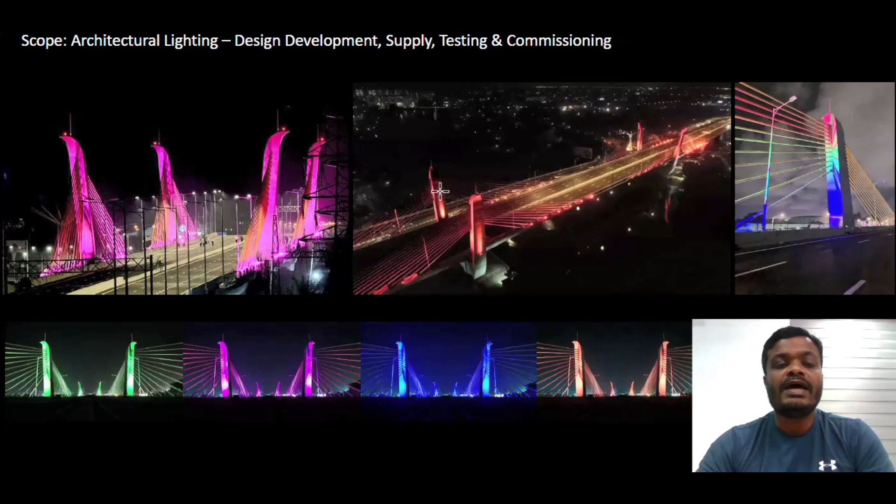Before we started the design, we had a couple of meetings with the client to understand their requirement and what the possibilities and challenges were in delivering this project as per the client requirement. So this is the bridge basically. At the beginning, the client wanted to illuminate the entire structure, meaning the top part and bottom part, including the cable ropes as well.

At the beginning, the contractor, because this project is a design-build contract under Sumitomo Mitsui from Japan, proposed to the client a single color solution, meaning a 3000 Kelvin warm white solution.

When we had a discussion with the client, they said they needed a color change solution for this bridge, and then we considered, with the budget, whether to illuminate the top part and bottom part both together or not. With the budget considered, we finally ended up illuminating only the top part, not the bottom part. There are a couple of reasons for that.

This bridge can be seen when we enter the bridge; we can see the cable ropes and the pylons only when entering. And from the city side, we can see the top part of the bridge on both sides, basically not the bottom. The reason is the bottom is covered by the existing bridge on one side, and on the other side the bottom part is not visible from far away. There's no city view from that side. So therefore, we decided we would only illuminate the top part.

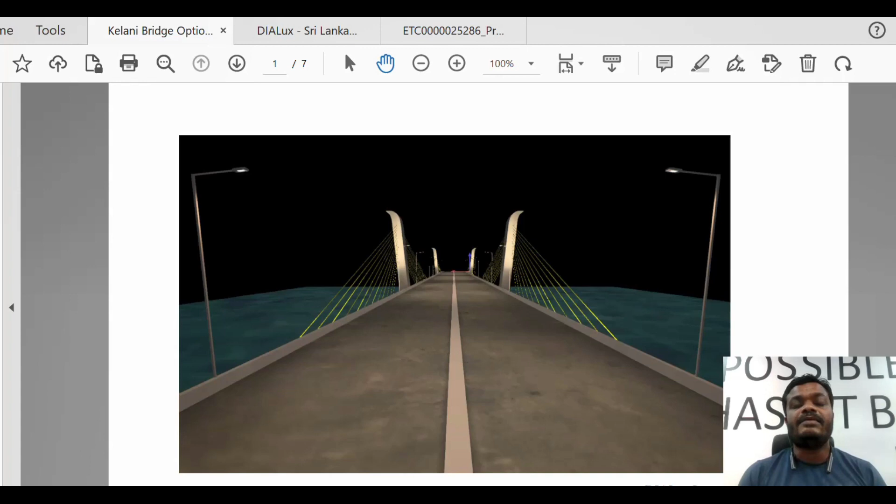Now we will move to the design part. When we started the design, we used Dialux software and some lighting softwares to generate lux level reports, rendering images and rendering videos. As I explained before, the first option was single color. It means white light, 3000 Kelvin. This was the report we generated for the single color proposal as option 1.

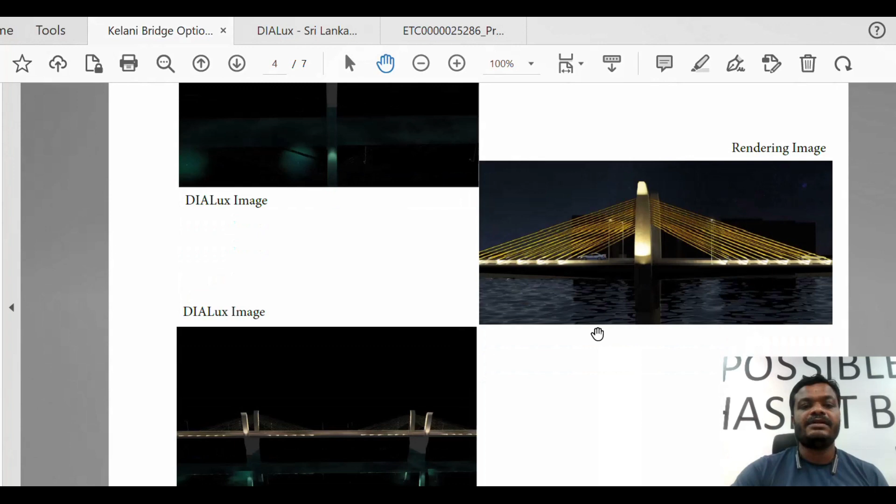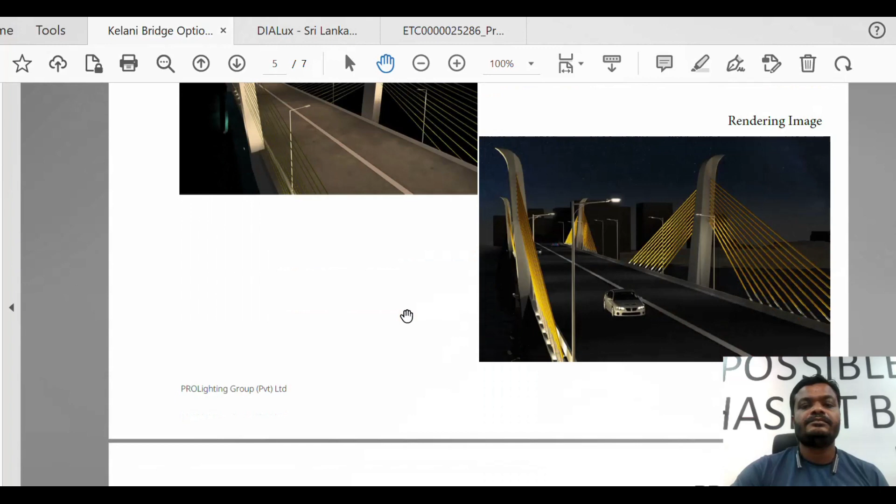These are the images we created using Dialux, different angles. This is the image on the water. This is the water surface reflection from the light. This is a Dialux report. Sometimes you might see, comparing with rendering images from lighting videos, this one is a bit different, but this one is technically more accurate, the Dialux software on the lux calculation.

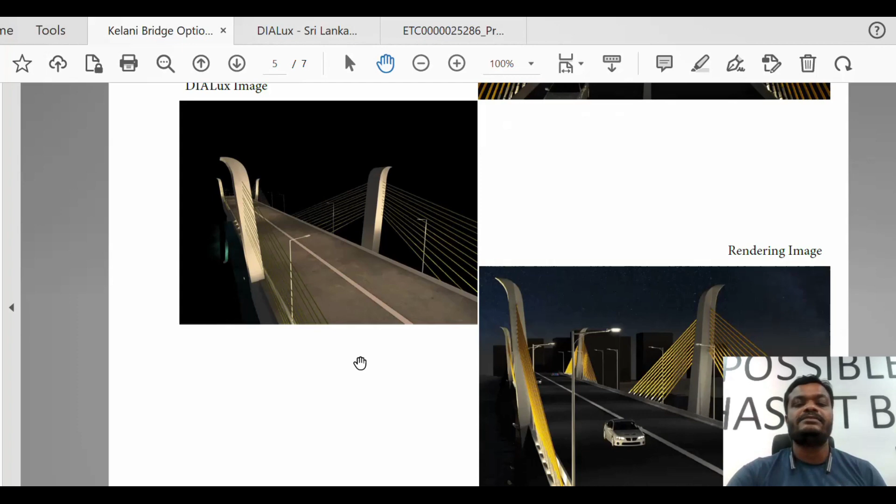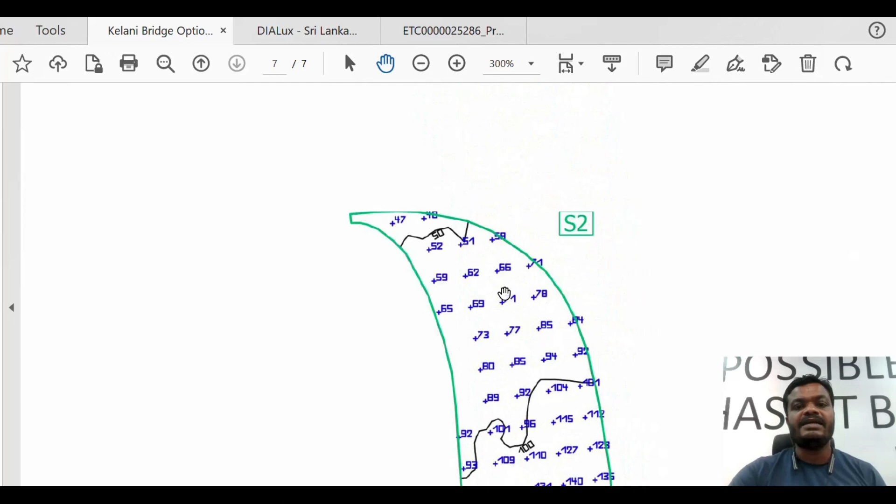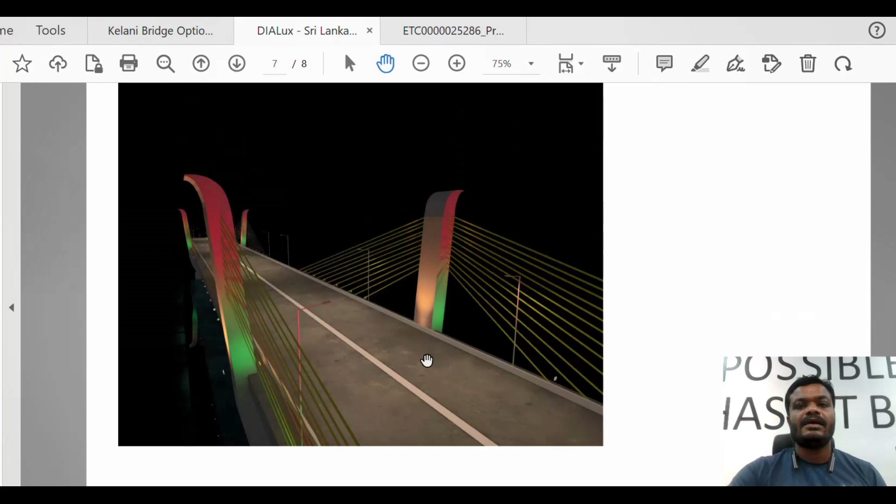So this is the Dialux map on the pylon. You can see the lux level on the pylon and the pylon side structure. This is the lux level, and later as option 2, we finally moved to the RGBW solution. These are the lux level images we created using Dialux software, and these are some images we used Dialux software to create.

This is the video we generated with Dialux and other rendering software to explain to the client. This is the kind of rendering video. Before I start this video, I have to explain the behavior of lux. When we calculate lux level, the behavior of single color and RGBW is completely different.

For example, a 100 watt single color light has a lumen output of around 10,000 at 100 efficacy. But when it comes to RGBW 100 watt, it is sometimes one third, sometimes 25% of the total lumen output. I will explain in a coming slide using data sheets of the light fittings why it is different. So let's see the video now.

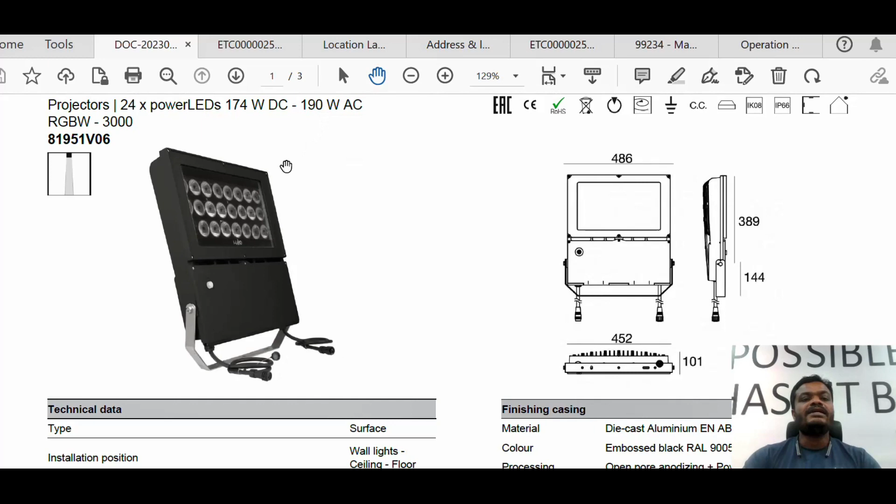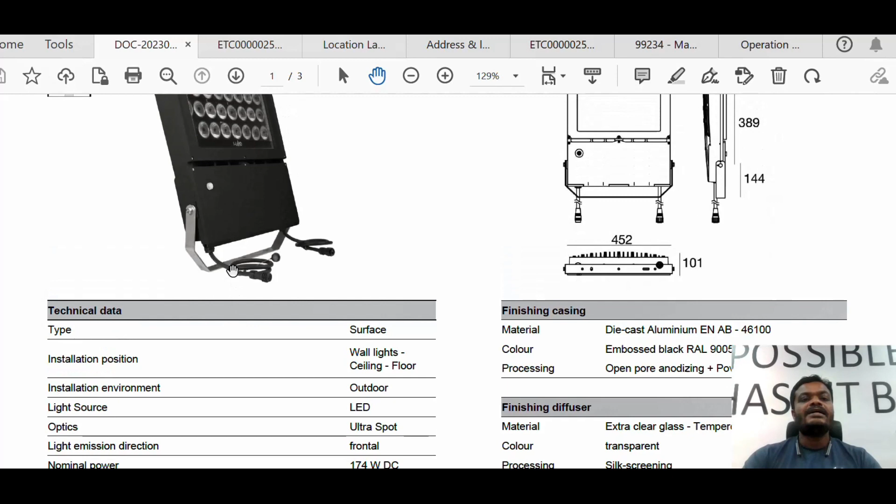So this is the light fitting we used to illuminate cables and sides of pylons. There are two wattages mentioned: 174 watt DC and 190 watt AC. So why are there two? The 174 watt DC is the effective power working with the LED modules, used for the Dialux lumen levels. 190 watt includes the driver part with the AC input, but for effectiveness we use 174 watt DC.

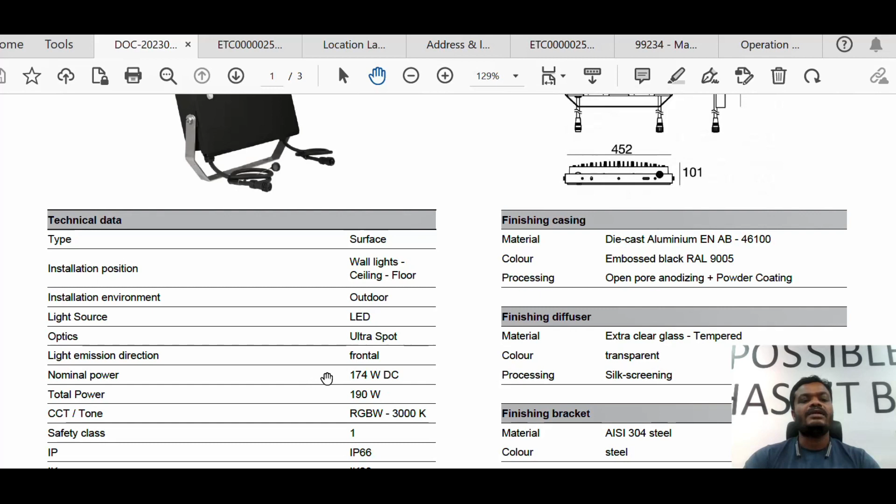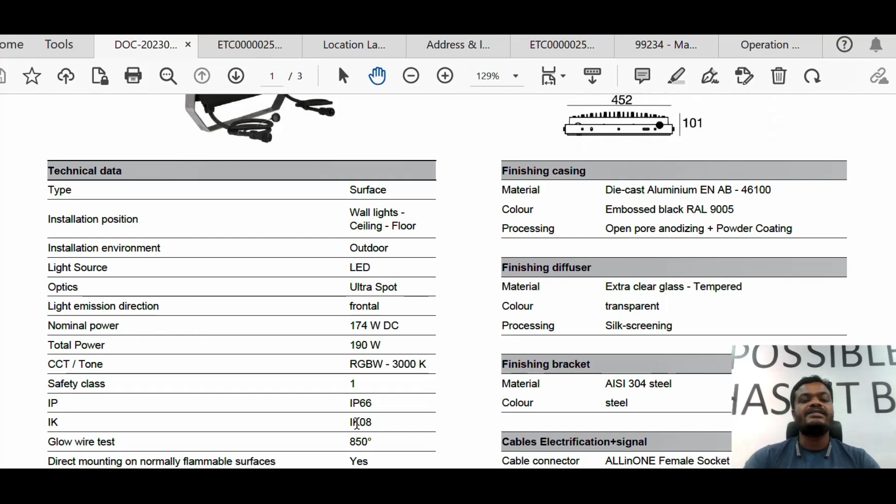A lot of the time, manufacturers give only one wattage, total power or nominal power, mainly nominal power, but for these fittings they have given two. IP rating is IP66, and IK rating, meaning the mechanical strength of the fitting, is IK8, and DMX control.

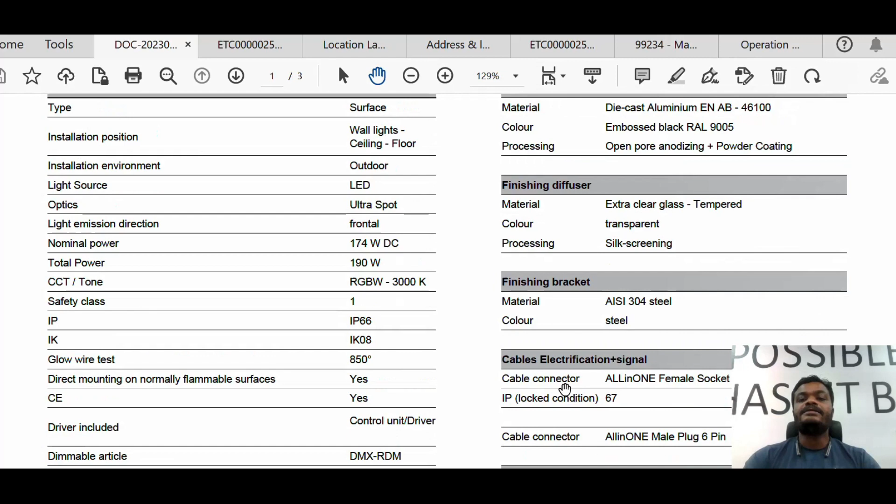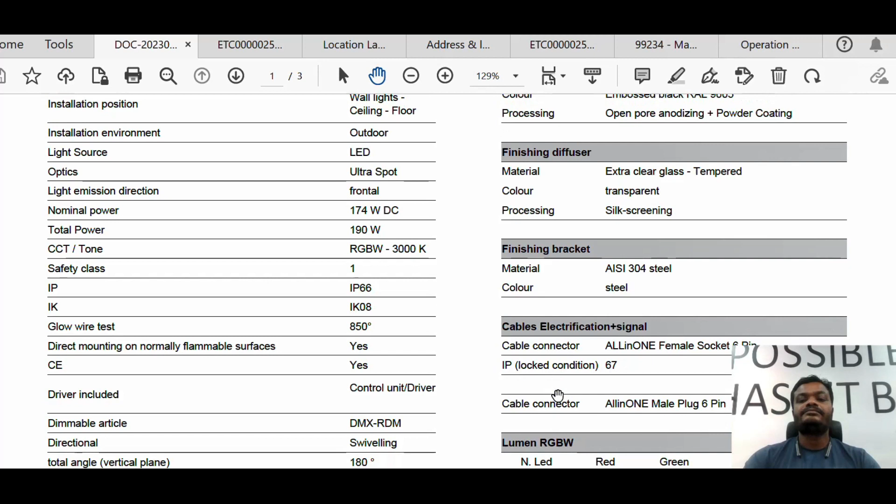These are the parameters: main parameters, casing parameters, finishes, diffuser parameters, and bracket details and signals. What are the ports available? See, this is what I have explained before. Later part I will explain. You can see four types of lumen output the manufacturer has provided.

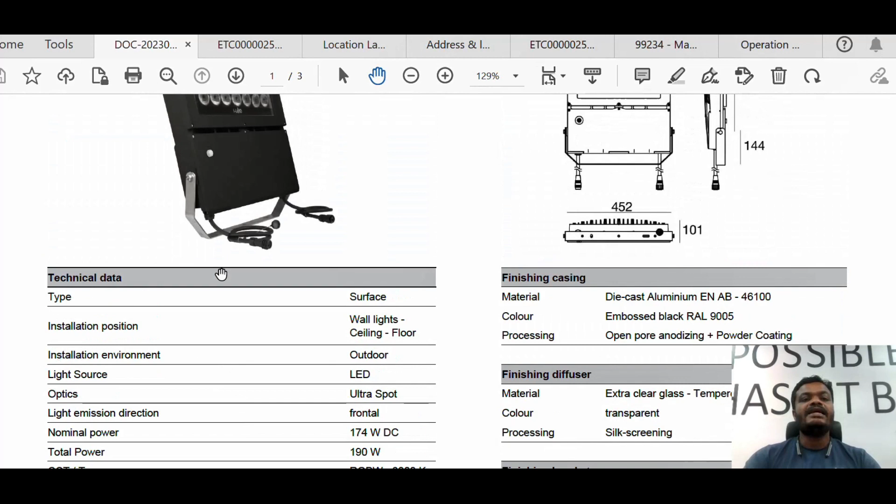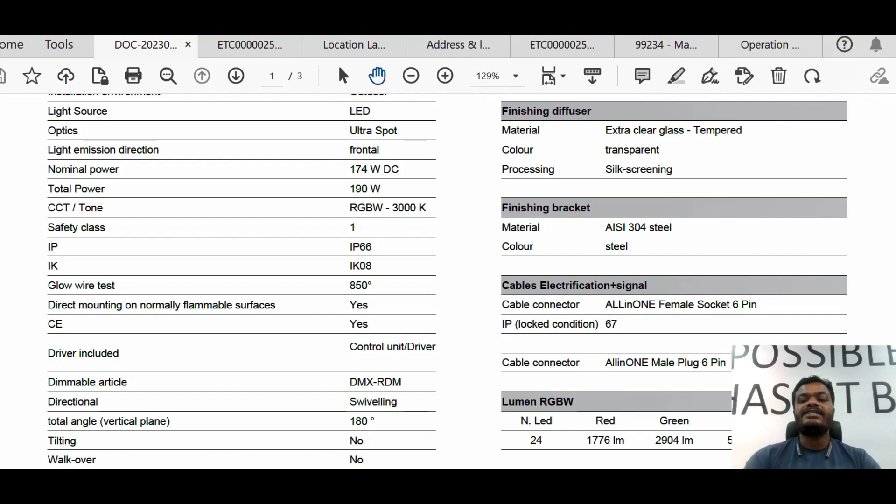It means in these LED modules, when RGBW comes, there are four types of LEDs in equal numbers. It means red LEDs only illuminate red, another group green, another group blue, another group white. With changes in the percentage and the dimming only, the fitting is releasing different colors we can see from the outside.

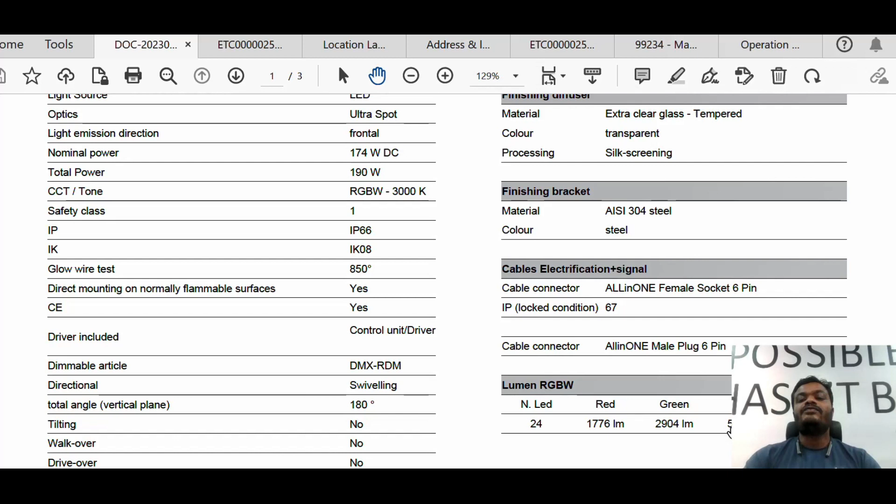So this means when the red LED modules are on and the others are off, this lumen output is 1776. When only the green LED keeps illuminated at 100% illumination level, it is 2904 lumen. When it is only blue, 504. If it is only white LED modules at 3000 Kelvin, it is 2028. So you can see, as I said, 174 watt at 100 efficacy.

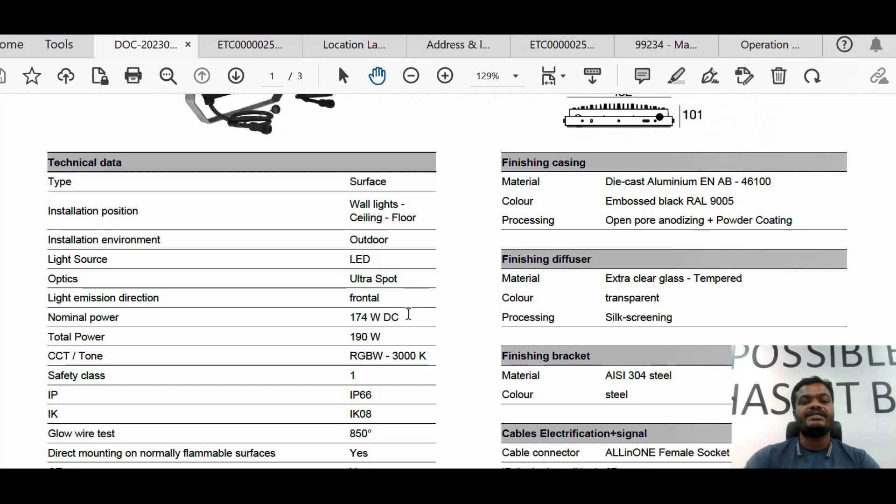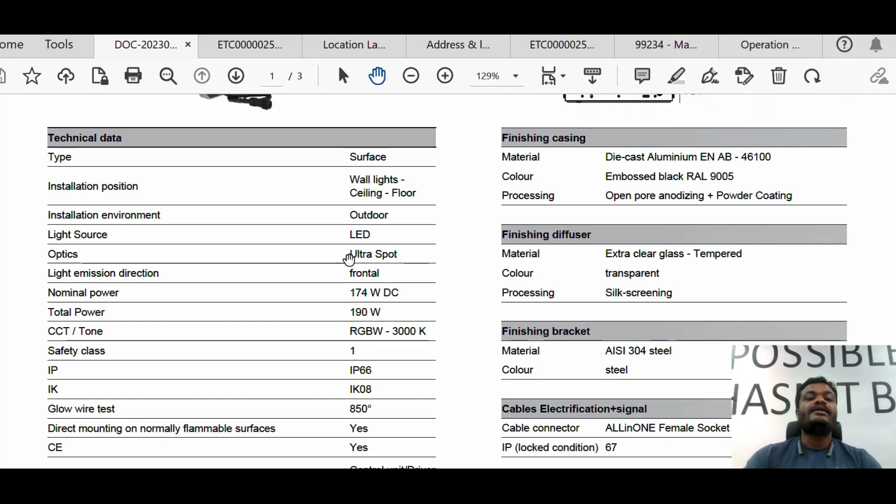Efficacy means lumen per watt. If it is 100 lumen per watt, this fitting's total lumen output, not RGBW, when it is in the single color option, will be approximately 17,000 lumen. But now you can see, when the fitting is RGBW, that lumen output is very much dropped. Only red is 1700 plus, only green very less.

To give white light, this is 3000 Kelvin white. If it gives 6000 Kelvin, these all keep on in equal, so generally this lumen output will be around 6000 to 7000. But you can't add these together to get that. You have to get the lab report only to get this lumen output.

That's why when lighting designers and consultants are using RGBW for the facade or any internal areas, normally we are not talking about the lumen output, or the lux level is also not applicable. But for this project, we did it as per the requirement. These things are the experience of lighting designers. In this project, we did the entire technical design, so this is our experience and our manufacturer's experience to select the wattage and etc.

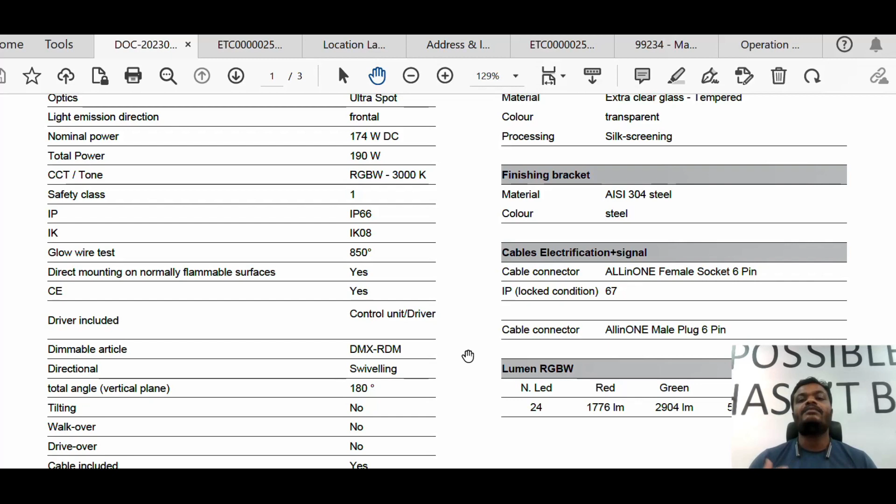So this is one of the main challenges. For some projects, there is time to get the light fitting down and do a mock-up. But for this project, with the time limit and the production time, we did not have time. Therefore, we basically used our experience and knowledge, added those into the lux level and the rendering, and got some idea to finalize the type of light fittings and the number of light fittings. So that's how we came to that.

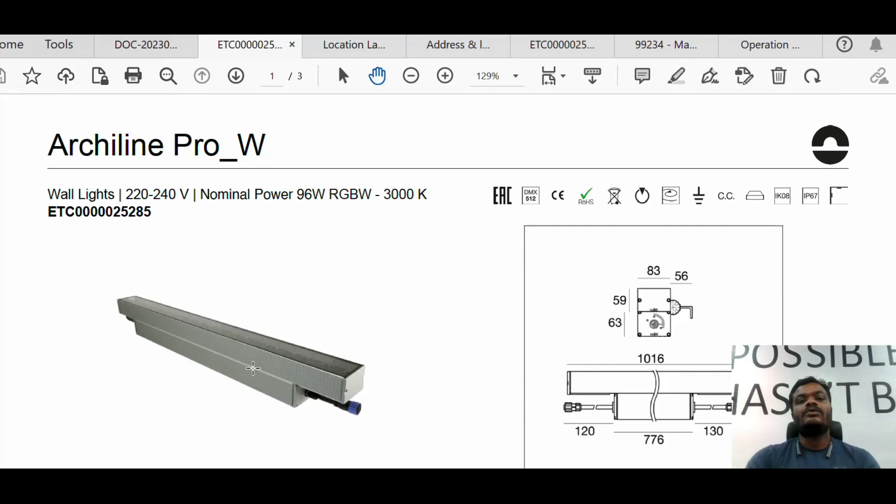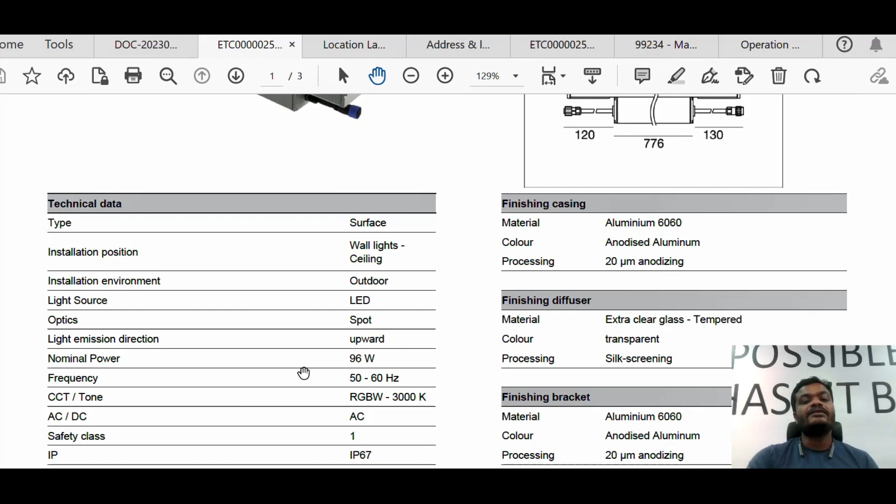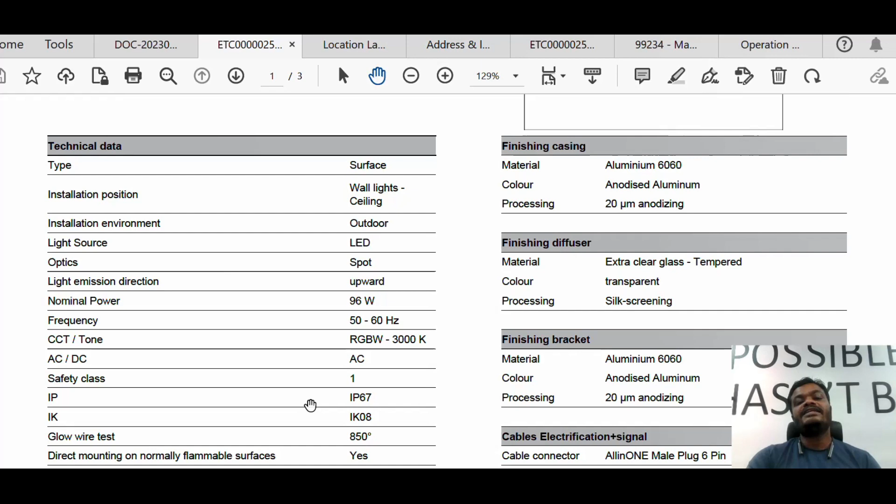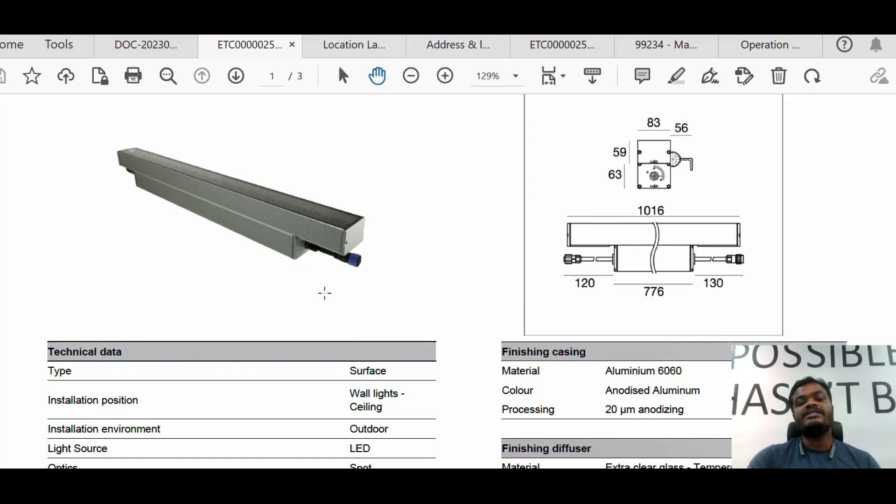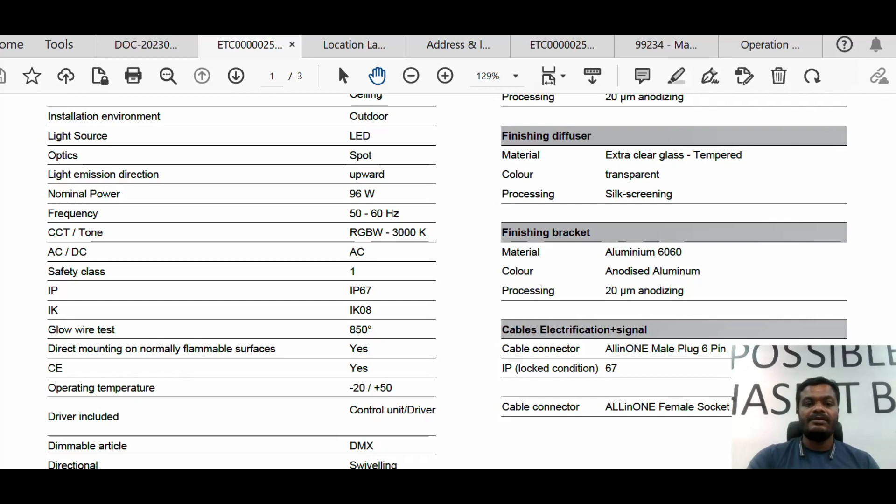Now, someone may have the question, why IP66 and IP67? As per the guideline, the minimum is IP65, but sometimes in the manufacturer's range of that light fitting series, they have IP66, sometimes IP67. For this model, they have IP67. The previous model has IP66. That's why we use those. In this one, they did not mention the lumen output in their datasheet, but we knew that lumen output even though it is not mentioned here.

So it means each pylon, each side has 6 light fittings to illuminate the cables and the side of the pylons. In that way, we have 24 of this kind of light fitting, and 8 of this type of light fitting. It means one on the outer side, one on the inner side, so each pylon has 2 fittings. Totally we end up with 8 light fittings.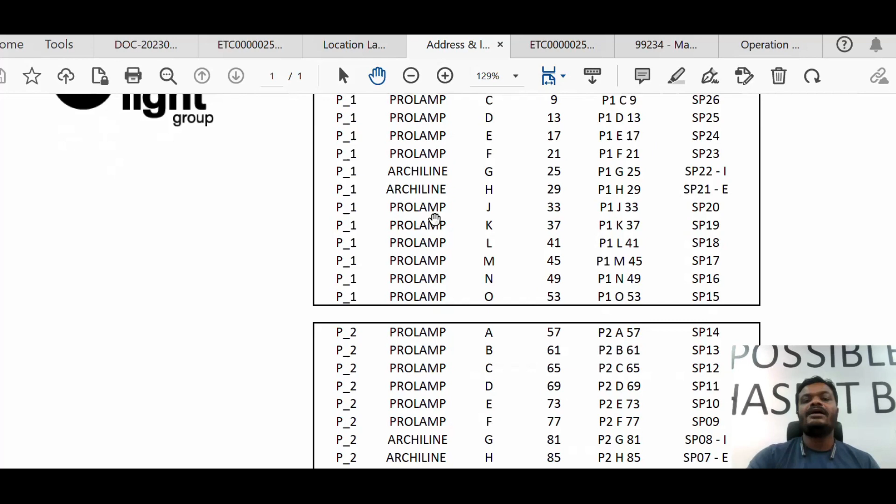So this is the address we have, because as you know, this is color change. There's a control system always, so there's a control line also. Therefore, each and every light fitting has a different address. Then each and every light fitting we have selected from the program side.

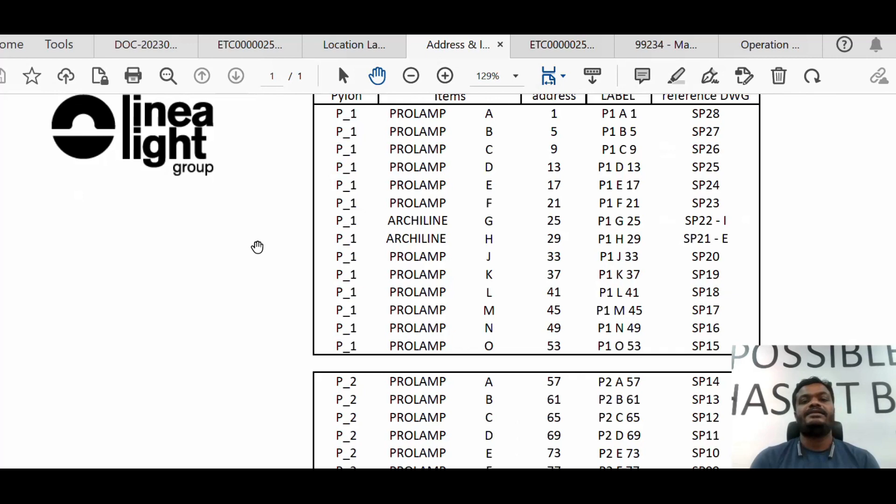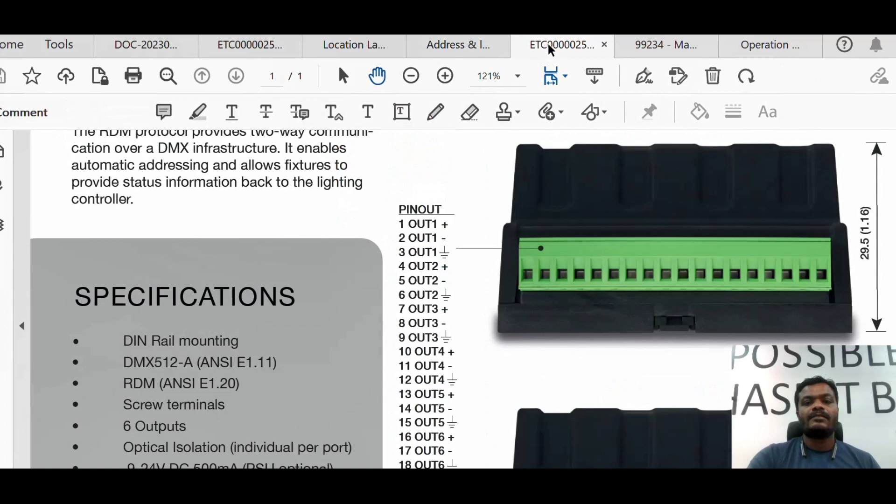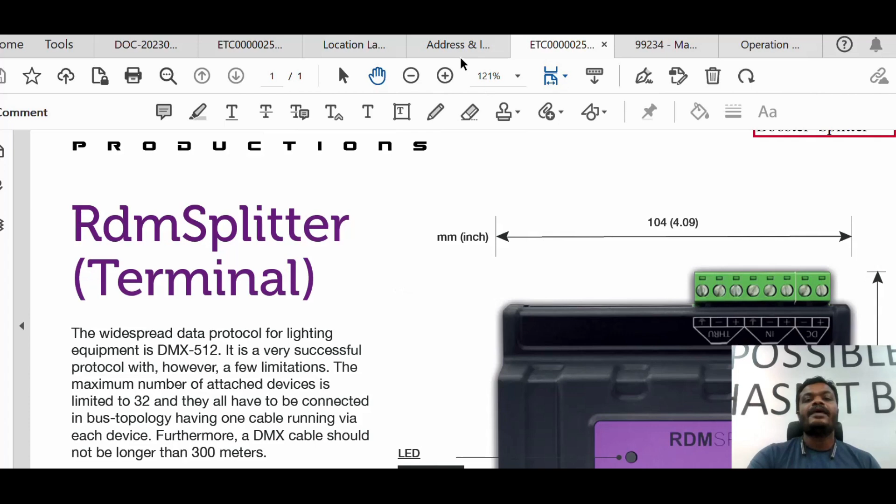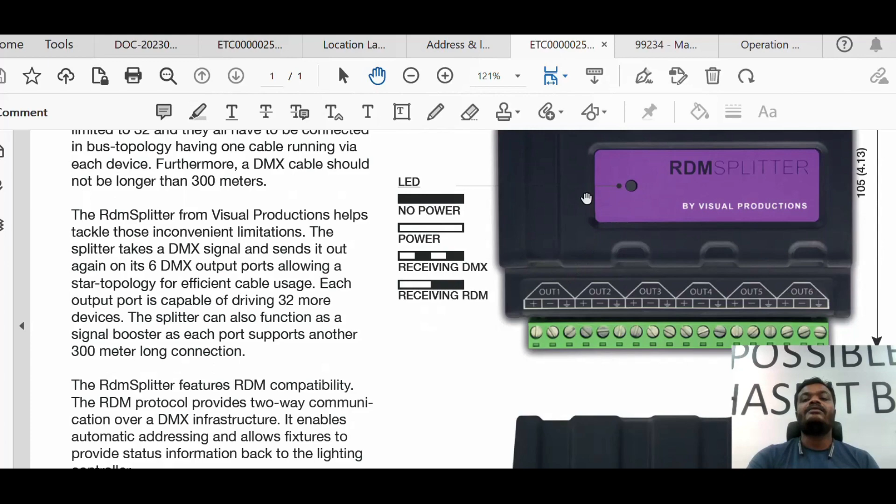And as you know, this bridge from here to here, the signal cable, there's a loop. So it is a couple of kilometers. So therefore, to boost the signal, we have to use boosters. We use this type of boosters. The number of boosters I will show you on the single line diagram. These boosters we used on the field, meaning on the field through the bridge, and one booster we used inside the master panel as well.

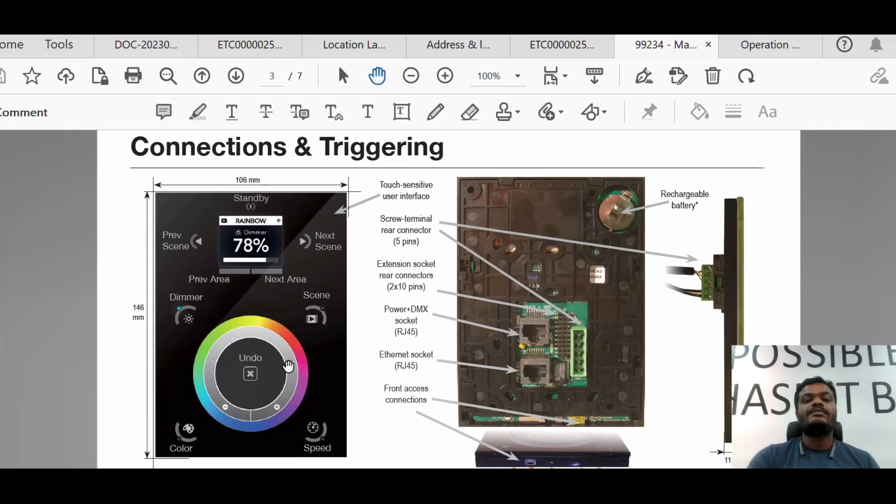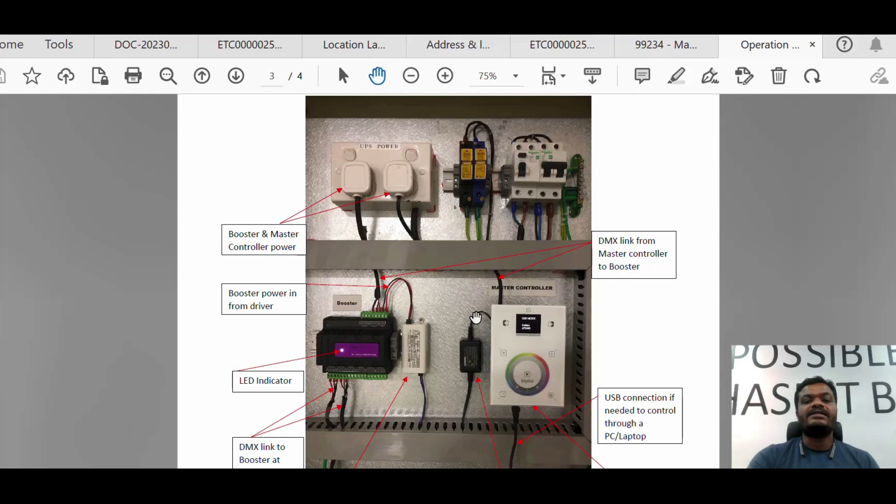And this is the master controller, a touch panel type master controller. These things come inside the control room. So this is the lighting control panel. It looks like that, the actual one at the side. This is the booster; as I explained, one booster we use inside the panel. This is the touch panel master controller. The booster is driven by the booster driver, the master controller drivers.

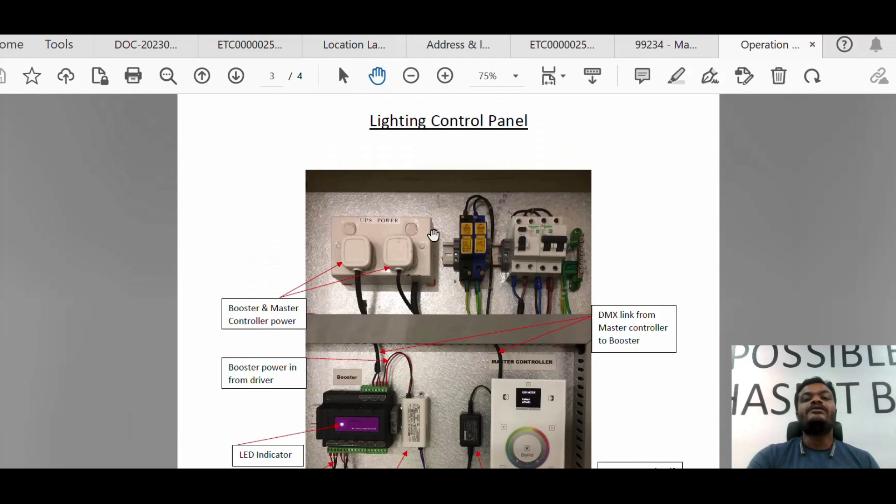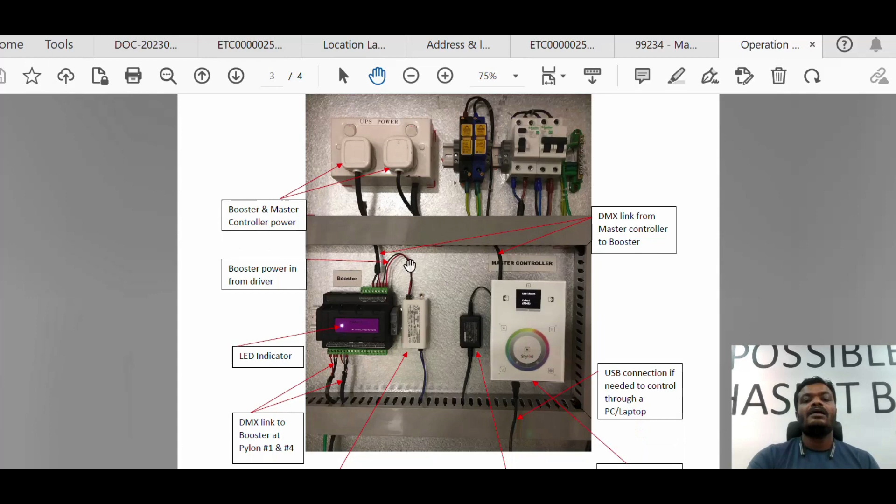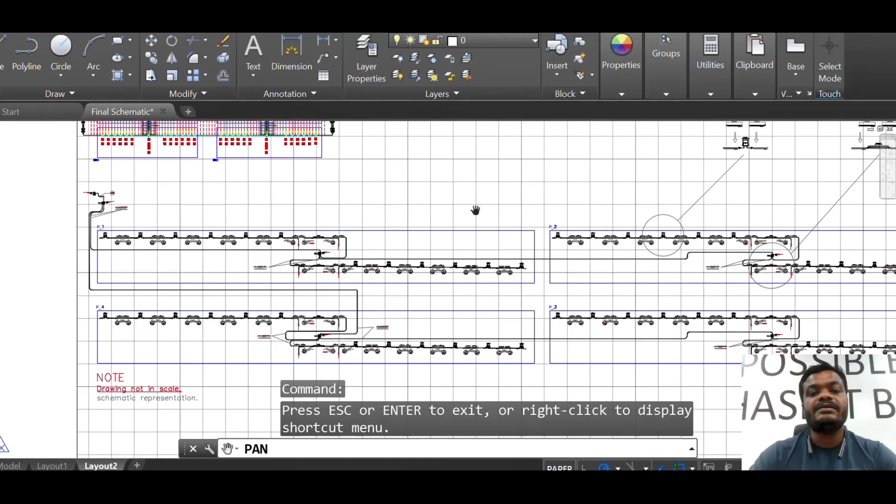Now technology has evolved a lot. Therefore, nowadays this kind of control system, the master control panel, is very simple, only a couple of items. So now I will explain the single line diagram. This is the line diagram we have designed for this project. You can see there are 4 pylons, as you are aware already: first, second, third, and fourth.

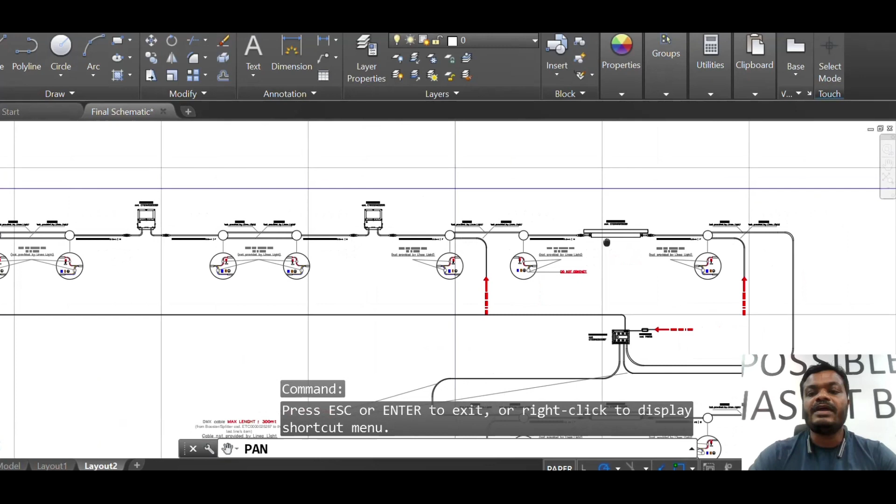Each pylon has 2 sides of light fittings, as I explained before. One side has 6 numbers of type 1 light fittings: 1, 2, 3, 4, 5, 6. This is the profile type of light fitting. Each pylon has 2 profile types, one on the river side, one on the bridge side. So this is one side, this is the other side of the pylon. This system repeats for each pylon in a similar way.

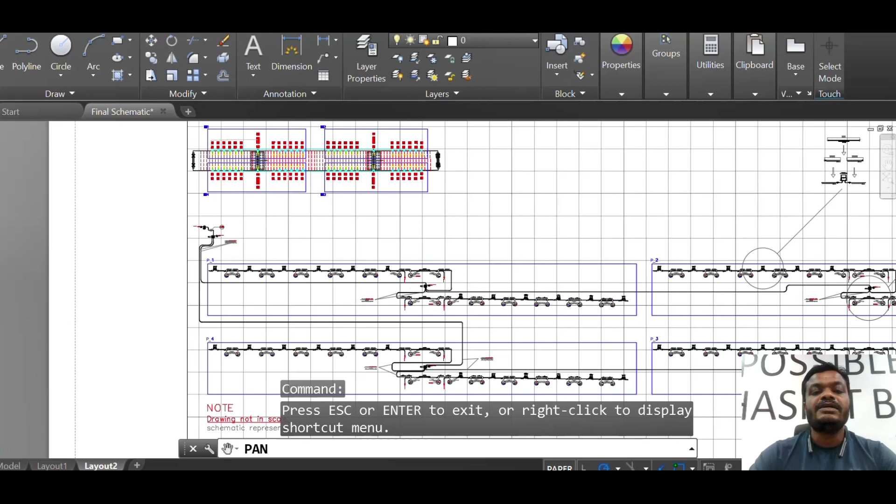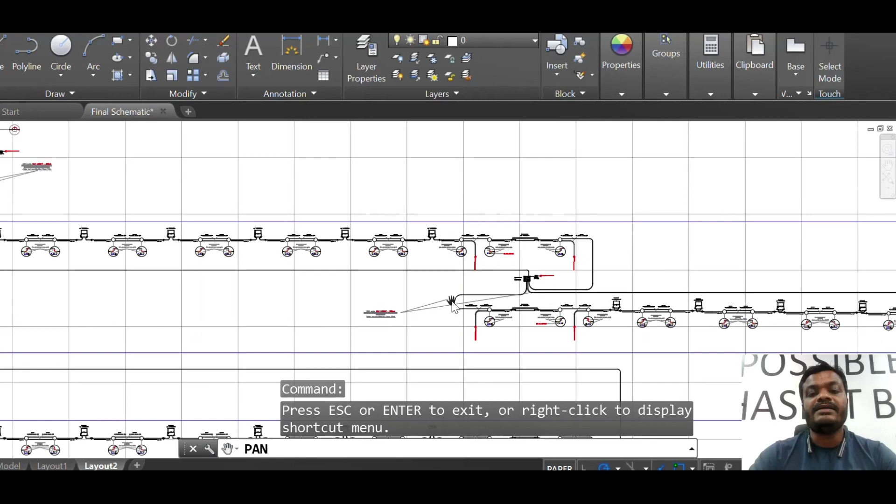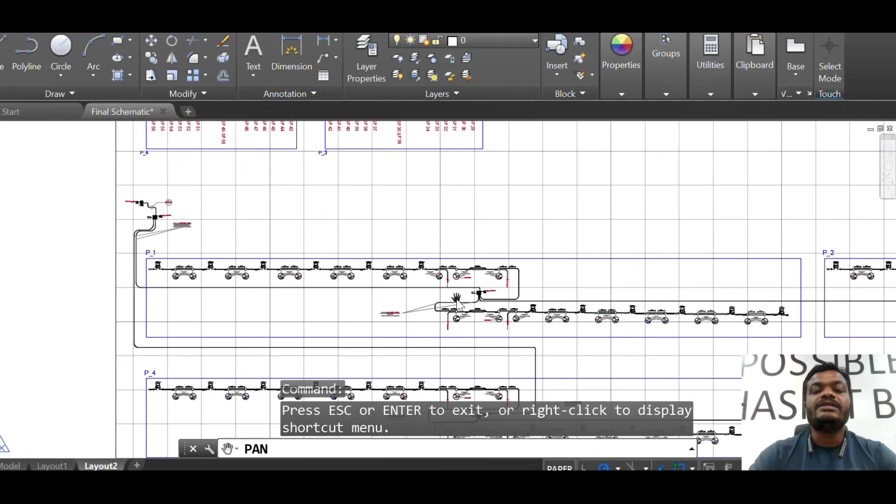You can see here these red lines are power circuits. 2 power circuits are coming to one side to power up one side of fittings. In total 4 circuits are given to one pylon, so there are 16 circuits in total. Then, as I mentioned before, there are boosters. We have used boosters to boost the signal due to the length of the signal cables. Each pylon has a booster, so at the field, four boosters: one, two, three, four. And inside the master control panel we also use a booster, which I showed you before. And this is the master control.

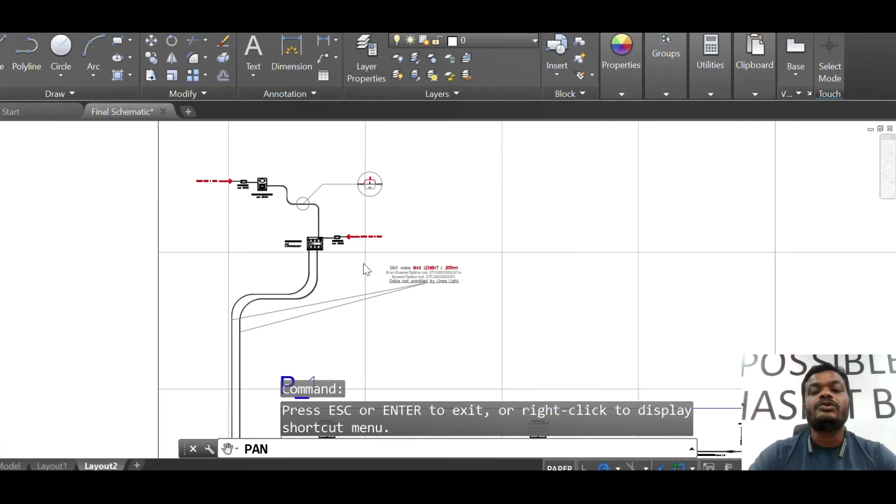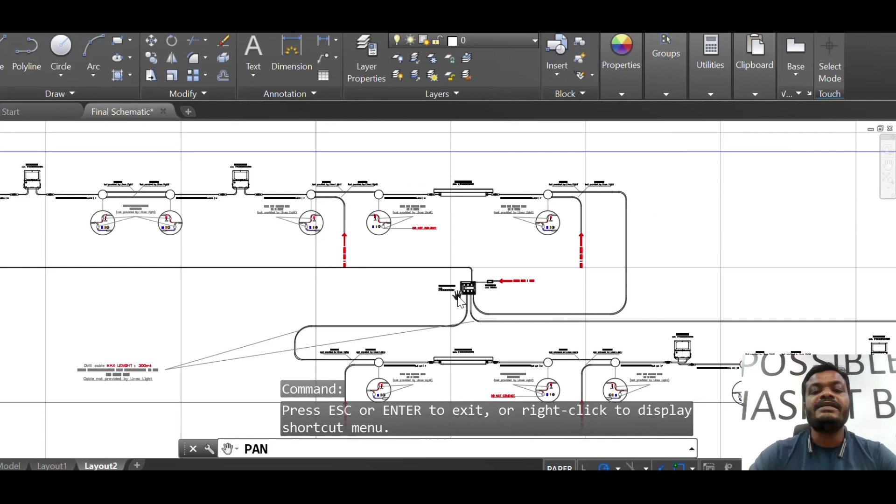These devices are inside the master control panel. Apart from powering up the light fittings, we also need a 220 power supply for the boosters. So we have to power up the boosters separately.

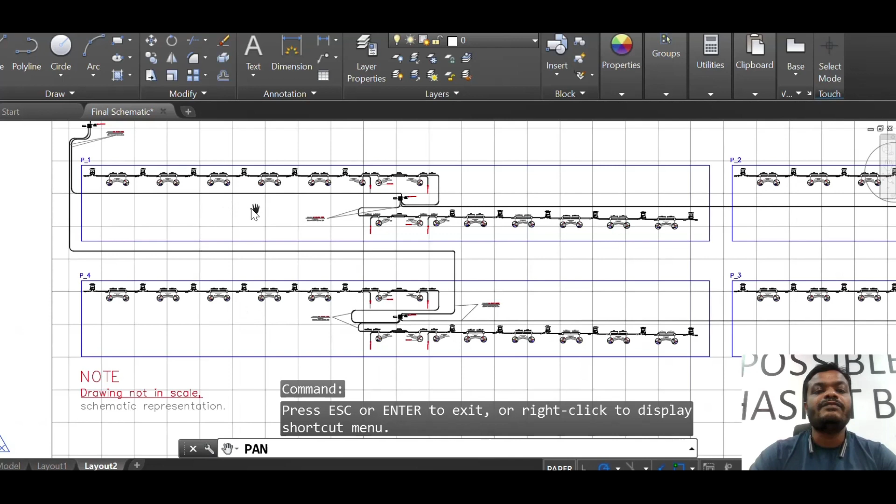Two lines of DMX signal cables are coming from the master control panel. One line is used for pylons 1 and 2. The second line feeds pylons 3 and 4. First it goes to the booster at the field. Then after the booster, it divides into distribution lines again.

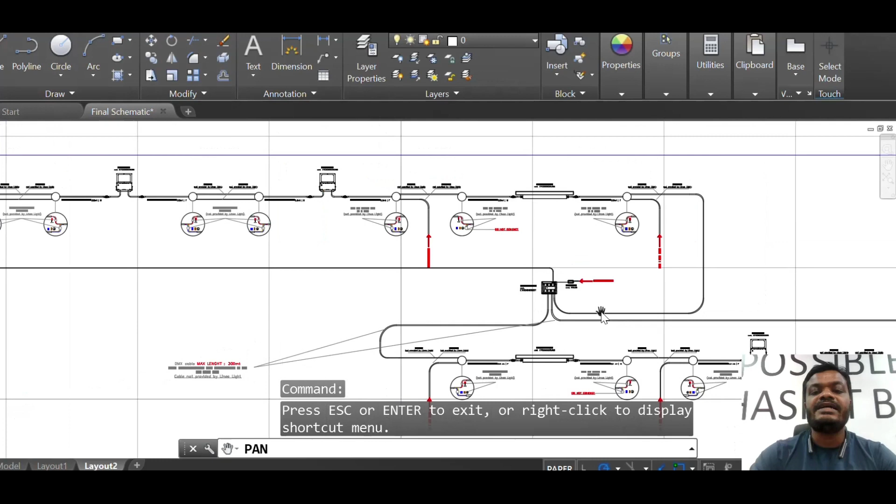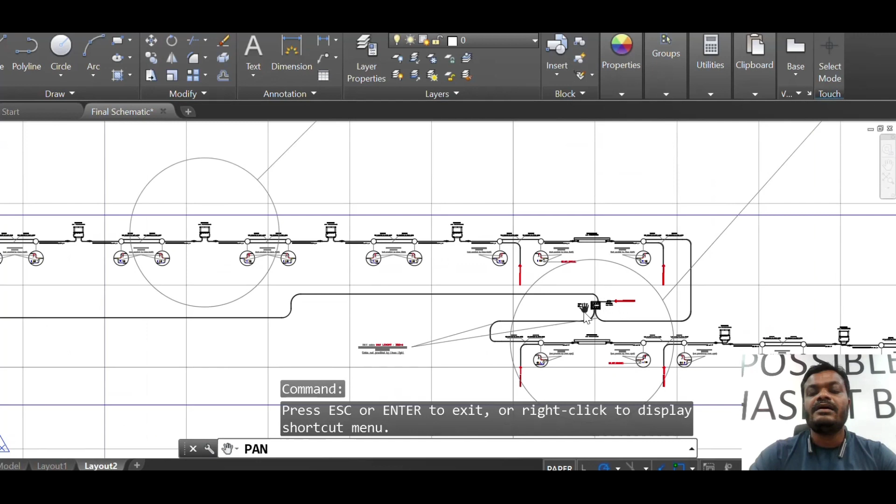This line gives control signals to this part, the second one to the other side, and another line goes to the other pylon booster as the input. Then there are again two outputs, one this side, one this side. The same system repeats for the other side as well. So this is the single line diagram. It is not that complicated.

I already explained how we came step by step from the design, from photometrics, then to the selections, then to the single line diagram. This is how we delivered this landmark project in Sri Lanka. This is still the one and only architectural lighting bridge project in Sri Lanka.